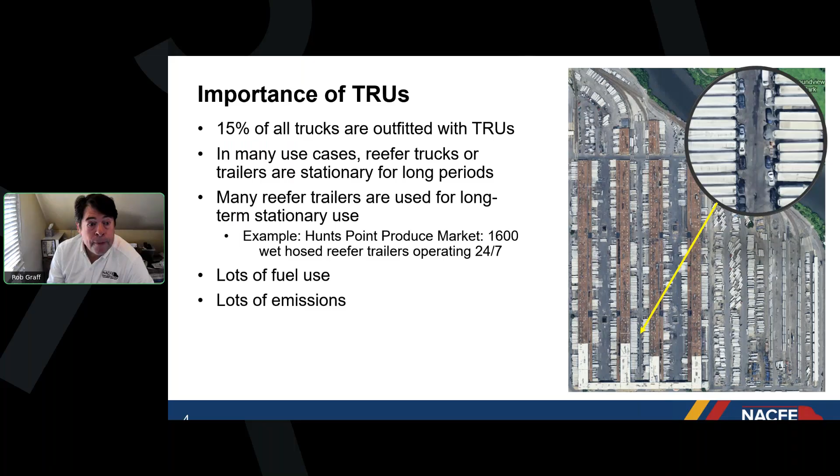This photograph is an aerial view of the Hunts Point produce market in the Bronx, just north of New York City, and it has 1,600 wet hose reefer trailers operating 24/7, which shows a real opportunity for where you could electrify these and save a lot of fuel and reduce emissions, and frankly, as we'll learn today, save a lot of money.

Today's webinar will provide an overview. We have 4 speakers: one will be talking about an overview of the current TRU technologies and when diesel, hybrid, electric TRUs make sense, strategies for reefer fleets to manage energy and cost, how incentives like the low carbon fuel standard can add value to a transition to hybrid electric TRUs, and then some real world lessons from a fleet that's already making the transition to diesel electric hybrids. And then we'll have time at the end for Q&A, so please put your questions in as they come across.

And quickly, I'll introduce our four speakers. We have Matt Srnec, who's a principal engineer of electrification at Thermo King. He'll be talking about TRUs. Manuel Aguirre, Vice President of Fleet Electrification at Ndustrial, will be talking about some of the energy side of this. Gustavo Loss, Vice President of Platform Sales at SRECTrade, will be talking about how you can use low carbon fuel standard credits and other credits for supplementing the value of transition to electric TRUs.

And then Danny Vehi, who is the U.S. Vice President of Quality and Sustainability at Martin Brower, will be talking about how that fleet is experiencing the transition to electric hybrid TRUs.

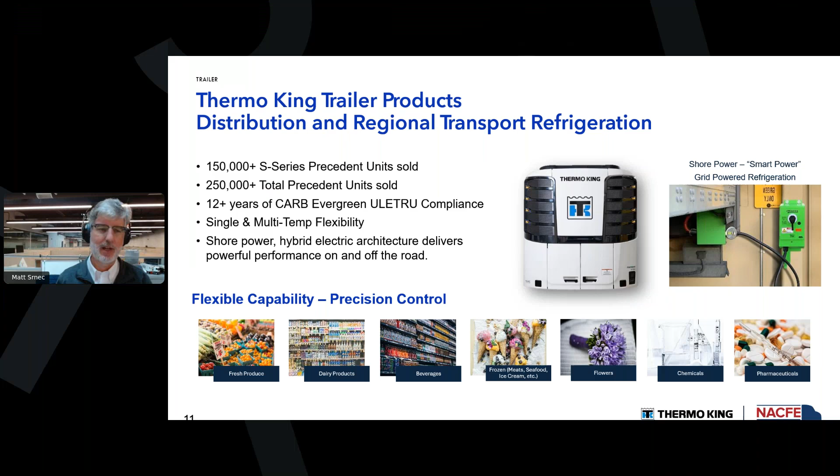Oh, I think go the other way.

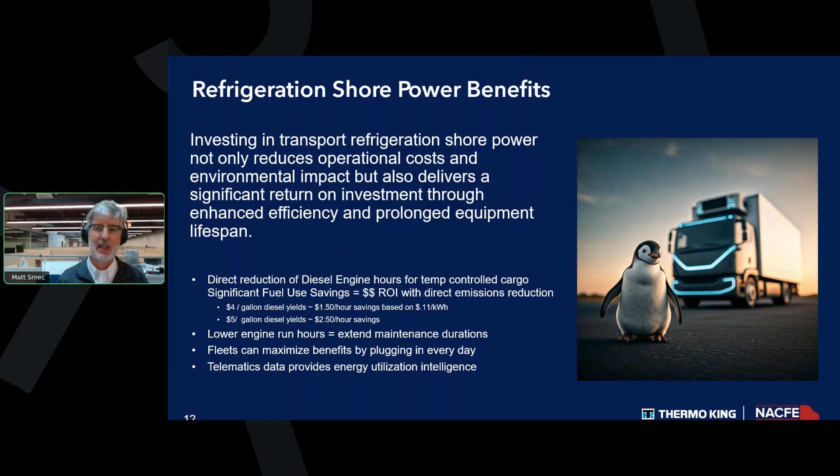fuel savings is the targeted area, but that's not necessarily always the best driver for managing or initiating this transition within fleets. You can also lower engine hours, extend maintenance intervals, and really measuring with telematics is a key to making these solutions happen. Next slide.

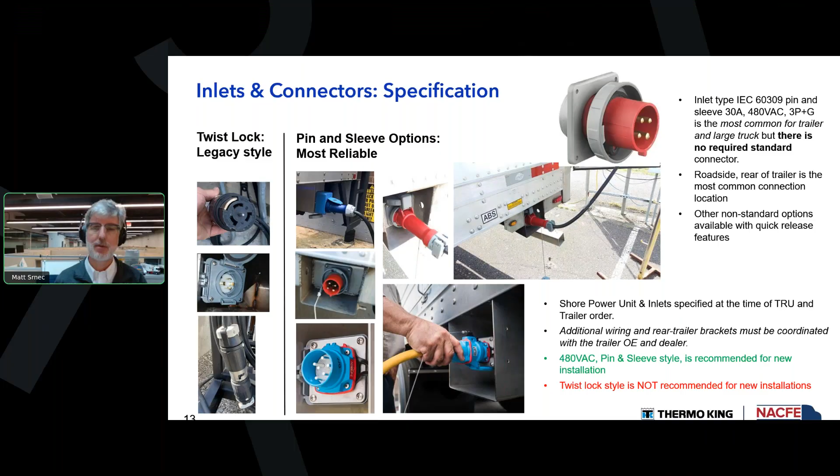And as far as voltage goes, 480 volts, three-phase, 30 amp circuits are the most common. Again, your location may vary. There may be different voltages. There are systems available either natively or through electrical infrastructure adaptation to make those work. Next slide.

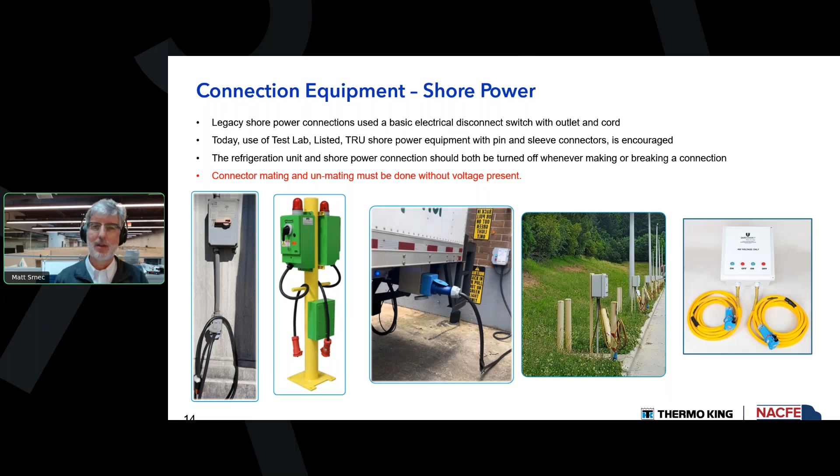You want to make sure that it has the right connector on it, the proper cord, and the proper features in it to create the best reliable connection for your equipment. I do want to state though that no matter what equipment you have, mating and unmating of the inlets to the cord from the shore power equipment really needs to have the power off during that transition. So don't unplug stuff while it's on. That's my message for today. Next one, please.

So most of that is available to be connected to the grid. Once it leaves, obviously, it has to run on diesel, but in the future, those systems could be running on batteries that have also been charged behind the fence. So go ahead, next slide.

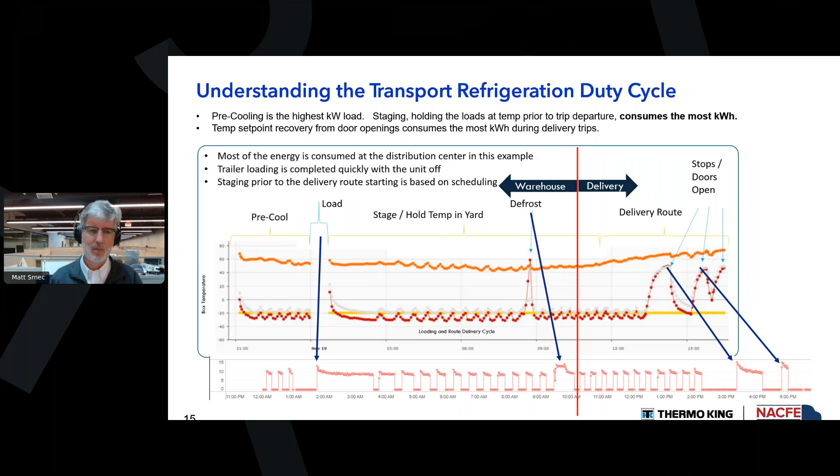We can come on site with you, we can do a site walk, we can go through analysis, and through our data, we can take the telemetry that you're maybe reporting on diesel today and help you convert that into kilowatt hours or energy consumption information that you can share with your utility. Next slide.

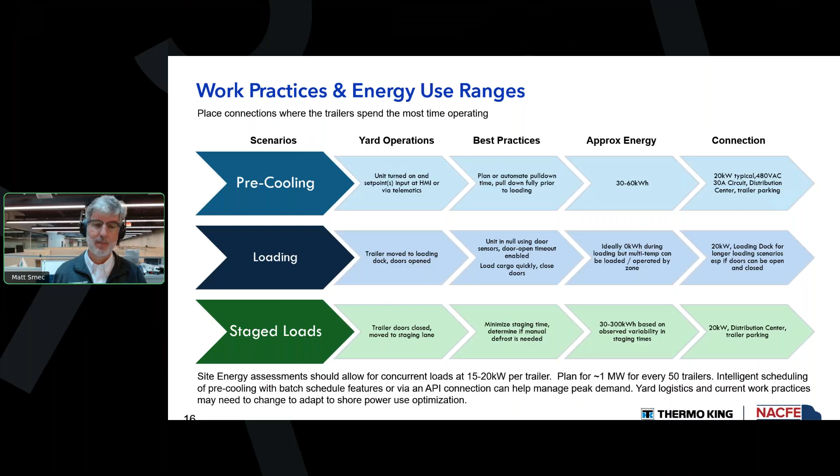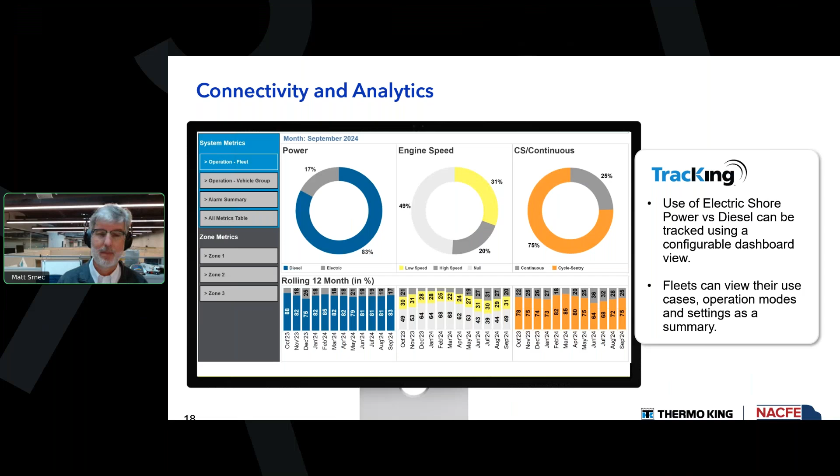RP 185, I'm going to leave you with this, is an RP, recommended practice, developed by TMC for shore power. There's lots of information here. It's available to all TMC members. We just completed an update on this, and I'd highly recommend that fleets that are operating with shore power today or looking to in the future reference this document for more information.

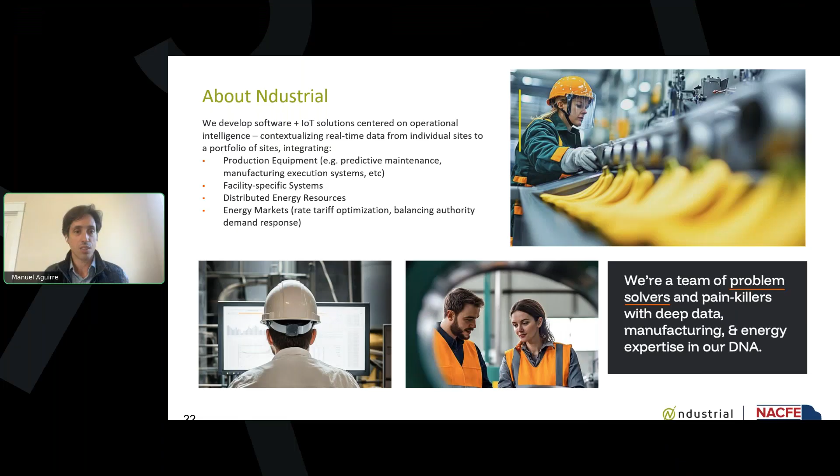Just to put some context to the problem, there's roughly 500,000 TRUs operating in the US. Most of them are running on diesel most of the time, regardless of whether they're moving on the road or stationary at a facility, burning roughly 1 billion gallons of diesel every year, generating 11 million tons of CO2. That's a lot of waste from our perspective, and we feel that there's a better solution. Next slide. So a better solution is possible. One more.

If you take these reefer trailers that are hybrid and you run them on electric, as Matt mentioned, there's a lot of different benefits at those facilities where these trailers sit. The air quality is not good for those employees, so it improves labor retention. It's a noisy environment as well. I don't know how many of you have walked through a cold storage facility, but the noise of those diesel engines running one next to the other is deafening. Diesel costs, as I mentioned earlier, carbon emissions, so a lot of opportunity to reduce this and realize those savings. Next slide.

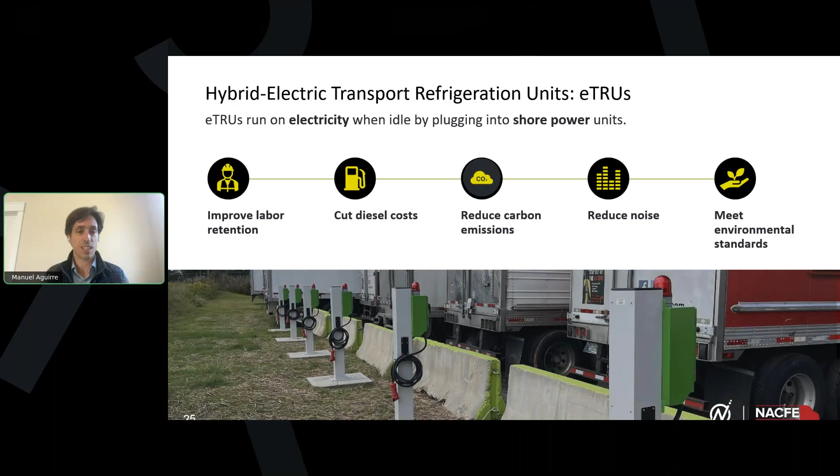This is a case study of a customer of ours operating a facility in California. They have a large site run by a single customer, roughly 23,000 loads per year. Because we have all this rich data from the operation, we are able to really dig deep into where the biggest opportunity lies, whether it's the yard area where these trailers sit, or at the dock, and how long they sit there. So we did some analysis with this customer to understand the opportunity.

Each trailer is on average sitting there for 7 hours. That means a lot of diesel burning, a lot of emissions being generated. Even after accounting for all the cost of deployment in a no-capex way, installing the infrastructure with financing and so on, the savings are immediate, in the order of $150,000 per year just at this facility, and cutting their carbon emissions by two-thirds. Next slide.

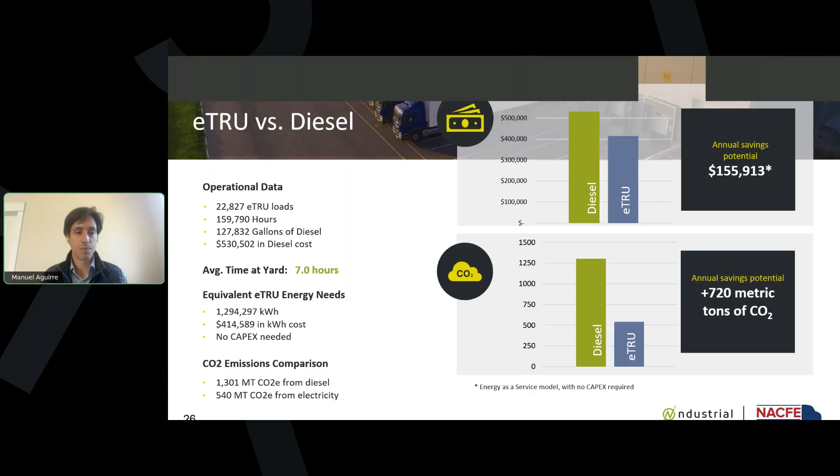Not all the loads are the same, right? Then you cannot realize the savings that you don't measure. So that's where software and data analytics become really important, right? If you don't plug in these trailers... the most basic problem that we see at the facilities is they have the infrastructure, they have the trailers, and they don't get plugged in. So how do you use technology to improve and basically realize the savings and opportunities that eTRU can generate?

Next slide. So as I mentioned, the first one and most important one is driving utilization, right? Understanding where those trailers are being routed, because not all the trailers are equipped with eTRU in a facility, and not all the yard locations have chargers if you want to have an efficient deployment. So matching those eTRU trailers with the eTRU parking lots is fundamental, is paramount.

And then once it's routed to the right location, then measuring whether they're getting plugged in or not, for how long, and how does that compare with the total time at the facility, becomes a key driver of realizing those savings. Again, you can have the infrastructure, you can have the trailers, but if they don't get plugged in, you're not going to realize the savings. Next slide.

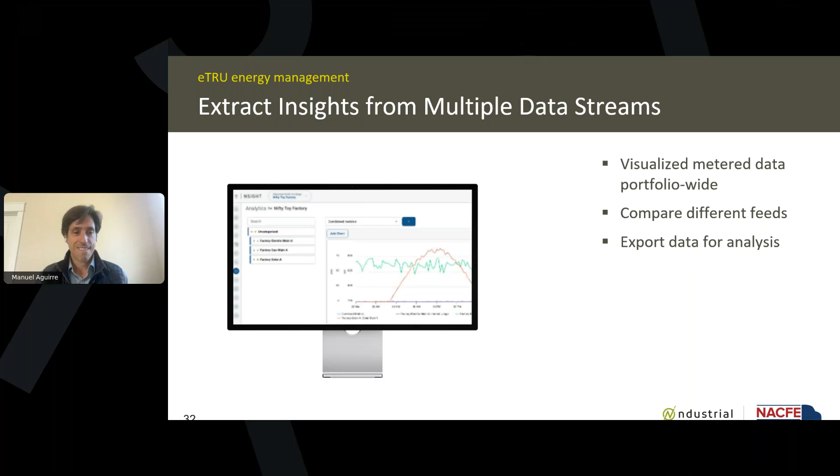Gustavo will go deeper into the carbon credits, but obviously measuring energy, measuring emissions is very important for sustainability programs, and then wherever they are available, generating the carbon credits also helps companies have another way of monetizing this solution. Next slide. And combining the data from other data streams and gaining deep insights on the cost of energy is also something that becomes valuable as you roll out this infrastructure. I got one more, Rob. Next slide. Oh, this one's repeated. Go to the next one, please.

This one, yeah. So when it comes to deploying the infrastructure, CapEx becomes an issue, right? So there's different ways to deploy this, both in fleets on sites, but also in third-party locations. Some of them are managed service. Basically, you can deploy this infrastructure as a service, and that involves no CapEx up front, and then basically the infrastructure pays for itself as you use it and you start saving, as long as the utilization is high and you are able to measure and track that the trailers are being plugged in.

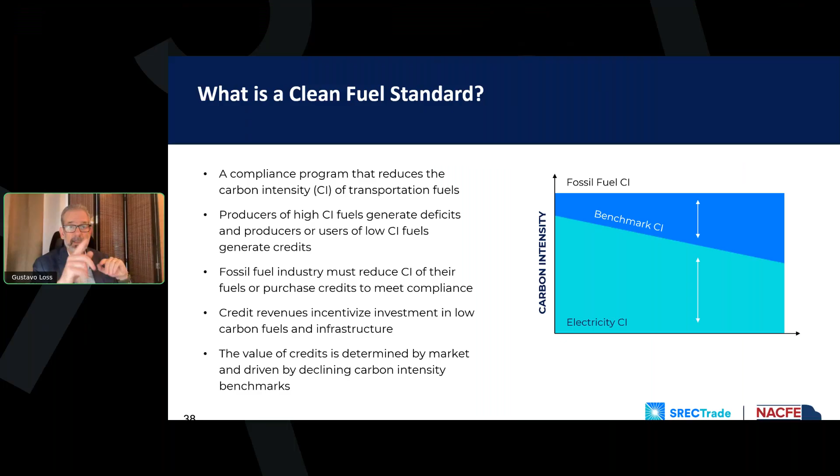Okay, so 35% enrolled, so good to know. So part of the audience, you're already benefiting, so we know it's real. We're talking about real revenue, and 65% no. Good news in terms of the opportunity. So literally, there is a potential for you to be generating revenue and offsetting part of the costs on the transition. Very good. So next slide, please, Rob.

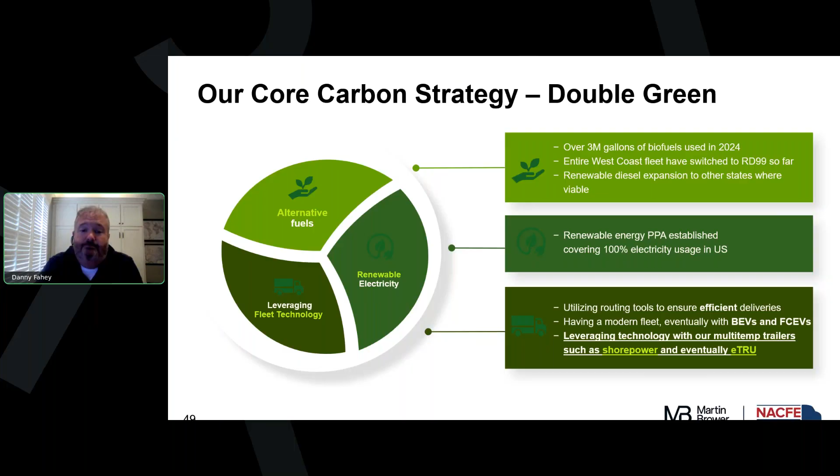So we've been transitioning and trying to expand our usage of this technology quite a bit. Several challenges that we've run into with our fleets over time. The first one was standardizing equipment, understanding that over the years, maybe we've had fleet trailers delivered with different plugs and different infrastructure. So standardizing that and upgrading that infrastructure to be in the yard. At one point, we were putting these along the dock, which is great, meaning we can use it for the short amount of time we're actually loading or unloading a trailer. But there's more time spent stabilizing temperatures and stuff in the yard. And so putting plugs in the yard was a big opportunity.

Changing driver habits, right? And overcoming past experiences with some of these older broken plugs and stuff, just changing that human dynamic so that we would get the usage and utilization that we hoped. And depending on the building and the facility, what demand is going on, sometimes this became a utility project as much as a fleet project, which unfortunately leads to delays, as getting large electrical equipment like switch gears and such can take longer.

So we've been working through that at several of our DCs. We think at this point we've identified the best equipment for our needs and have rolled that out and standardized that across our fleets. When we do roll this out at a new DC, we utilize lean kaizens and those types of Lean Six Sigma approaches to engage our drivers and help develop and change those behaviors. Develop custom training so that everyone involved with this knows how it works, where the challenges are, how to troubleshoot certain things.

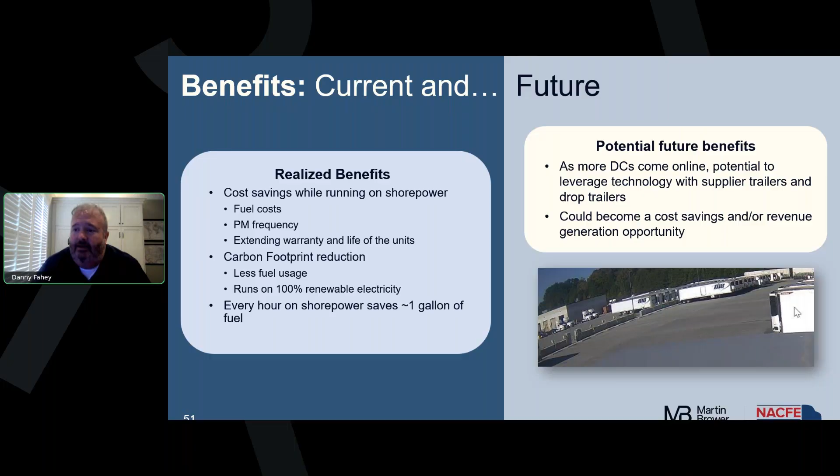Just as an aside, I just got a note from Mike Roeth, our executive director, that he's listening to this while he's walking down the street, and he just passed by a Martin Brower truck. So you guys are everywhere. Happy to hear it.